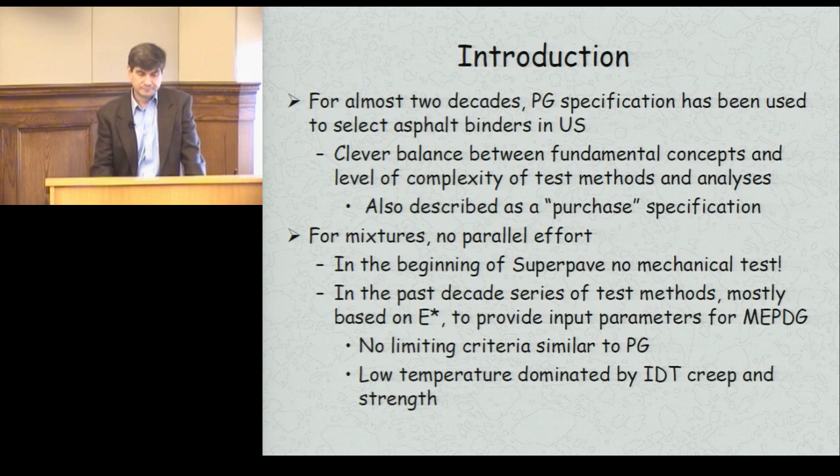So there was no limiting criteria similar to what we have for asphalts, and in particular for low temperature, there was a test method called indirect tensile test that was used to provide creep, stiffness, and also strength of asphalt mixtures at low temperatures. All right, so let me give a little bit of background on this low temperature testing.

that we have on asphalt binders. It all started many years ago with research done in Canada. Canada has even lower temperatures than we do, so there's no surprise they were among the first to do that, and this was happening 30, 40 years ago.

Basically, they found out that there is a correlation between the mixture stiffness measured after 2 hours of loading time and instances of transverse cracking in asphalt pavements.

And basically, they had the idea that if you have a material that is stiff, that means that material is also brittle, which at that time probably was not too far from reality, because we were using plain asphalt binders, no modifiers, no recycled asphalt, no newer technology. So that probably was relatively valid. If you had high stiffness, automatically that meant brittle material, which most likely will crack.

That was extended later on to asphalt binders using an empirical method based on a Van der Poel nomograph. Imagine 30, 40 years ago, computers were not used the way we use them today, and we relied a lot on graphical methods. There were some calculations that correlated mixture stiffness to binder stiffness, and this is what was used to actually develop the binder specification.

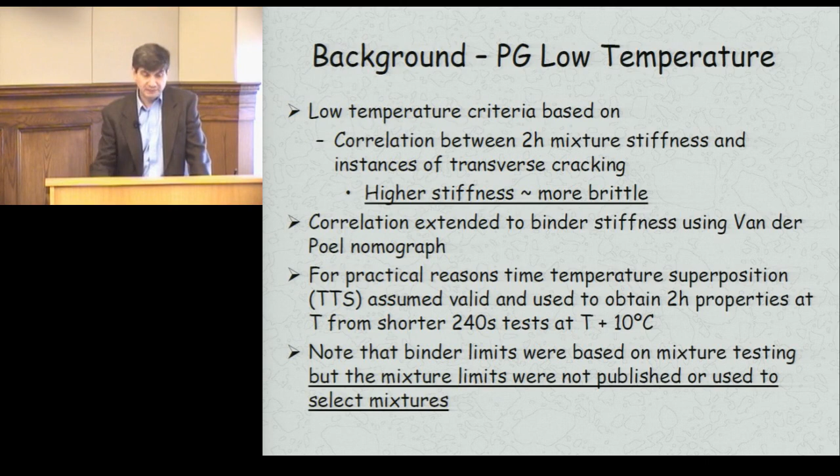So this is where the current PG specification comes from. Basically, the researchers came up with this limiting number: stiffness at 60 seconds at the temperature related to where you build your asphalt pavements should be no higher than 300 megapascals. So if it's higher than 300, that means it's too stiff, that means it's brittle, that means it will crack. That's how we actually buy asphalt binders today.

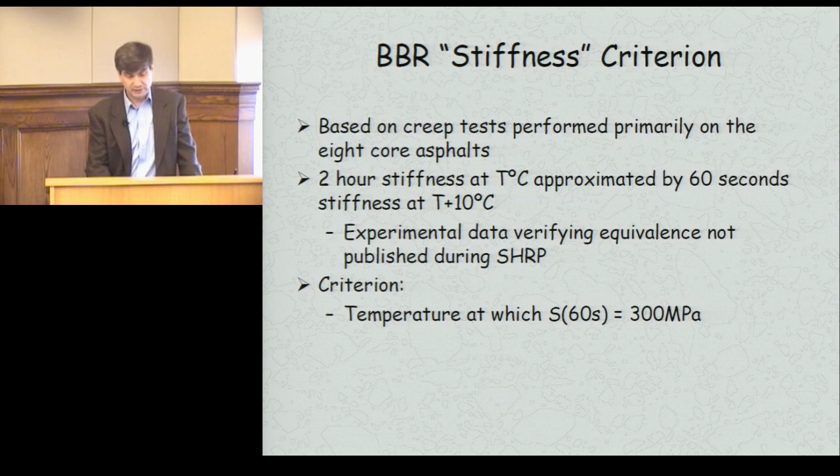They also added another parameter that is mostly related to relaxation properties of asphalt binders. Actually, it's a surrogate type of parameter because it is the slope of the creep curve and not the relaxation curve. But I'm not going to get into this discussion, though this specification also has another parameter called the M value.

There was a limit on this M value of 0.300. Basically, what this tells you is that if the slope is higher, more than 0.3, most likely your asphalt binder has good relaxation properties, a good viscoelastic material that relaxes stresses.

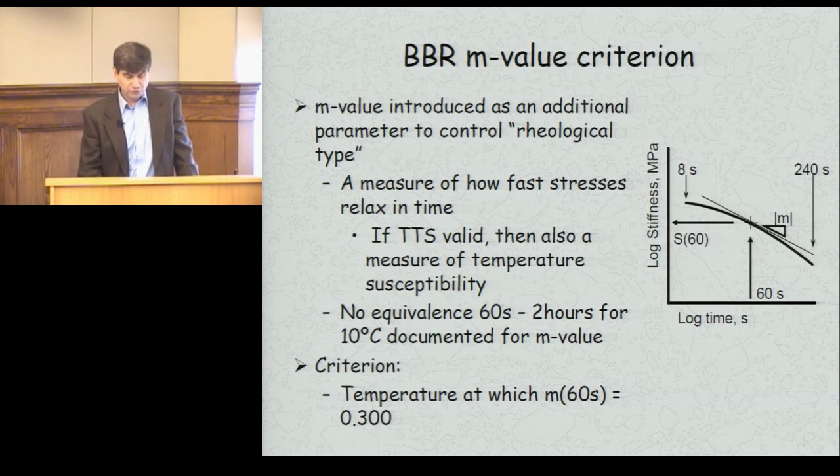As it gets colder outside, as happens in winter, this material is not going to hold these stresses, so it's going to relax them. That means it's very good for preventing cracking from occurring, which is a very good property of asphalt materials that are viscoelastic. So that's where it came from.

There was an attempt to include an additional phenomenon called physical hardening, which complicates things quite dramatically at low temperature, reflecting unique properties of not only asphalt but other polymeric materials. If you keep this material at low temperature for longer periods of time, the properties change. It becomes stiffer and stiffer with time, not just with lower temperature.

So at the same temperature, if you test the material after 1 hour, you get a set of values. If you test after 2 hours, those values are going to be different. So there is a stiffening effect. Basically, the structure of the material, depending on how fast you cool it, does not follow the temperature change. So the material changes slower and continues to change even though the temperature does not change anymore.

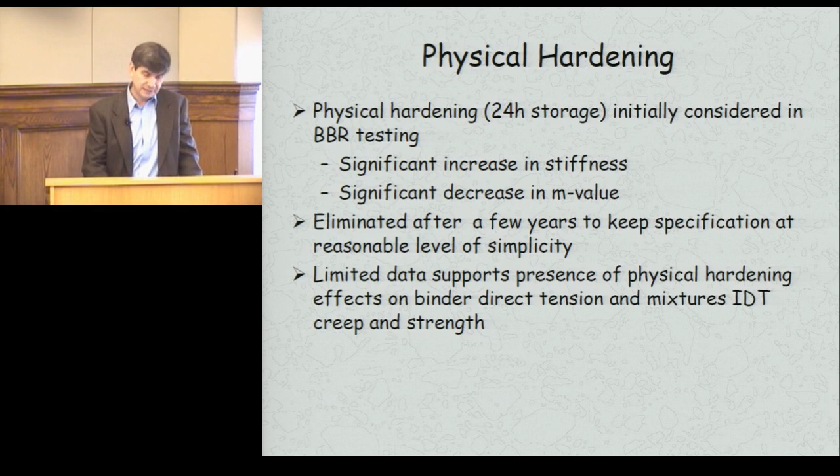But this was another complication, so it was taken out of the specification. The PG spec doesn't have that for asphalt binders, although it has been proposed in Canada by our colleague Simon Hesp, and it is currently used in Ontario.

Maybe some of you are aware that there is a 10 degrees Celsius shift, as I mentioned. For example, if a binder has a grade of minus 34 Celsius, the test is actually done at minus 24, so that requirement is for minus 34 plus 10 degrees Celsius. That's how we do it.

It's quite unique. If you ask somebody outside the asphalt area, they are going to be completely confused. This was only due to the fact that we wanted to shorten the test time from 2 hours to 60 seconds.

In my opinion, maybe it is time that we give up these 10 degrees. As I said, other people have no clue why we're doing that, and maybe we should try and focus directly on the temperatures, on the parameters that we get at the test temperature that we use today. But I'm not going to get into that discussion.

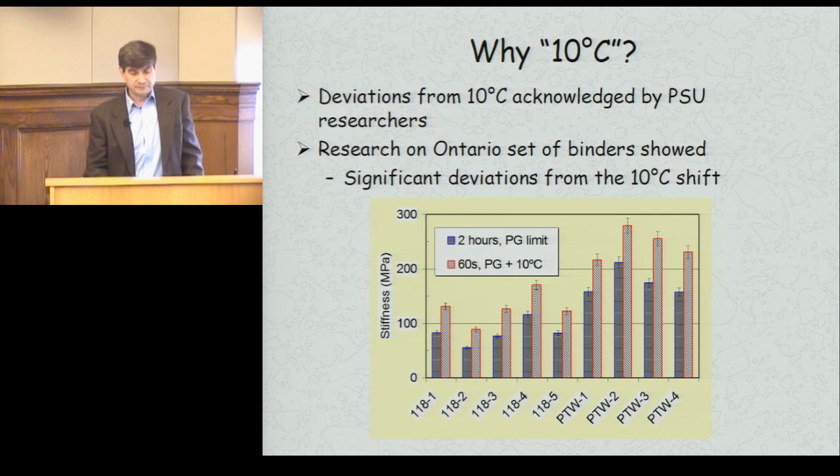As you can see, there are deviations from this 10 degrees rule, so not all the binders tested at minus 24 will have the same properties at minus 24 minus 10 degrees, which is minus 34, for example. I know it is a bit complicated, but that's how it is right now. So what I'm trying to say is the current PG spec has a number of limitations, and I'm going to make a point about that.

Why is that important? There was also another test, the only fracture test in the binder spec, the direct tension test, developed by my former colleague Raj Dongré, who spent a lot of time on it. It was the only fracture test, a very nice test.

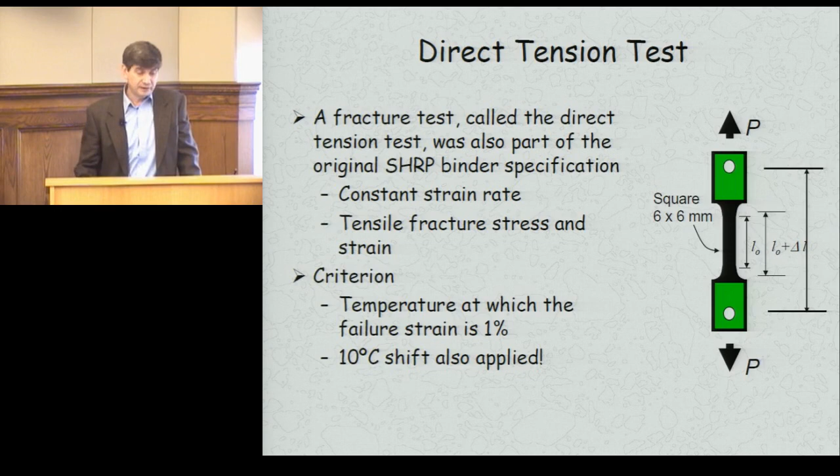However, due to poor repeatability, which is the case with fracture type tests, unlike the other non-destructive ones, fracture experiments are by nature less repeatable, and there may have been something associated with the material itself, but this was not explored.

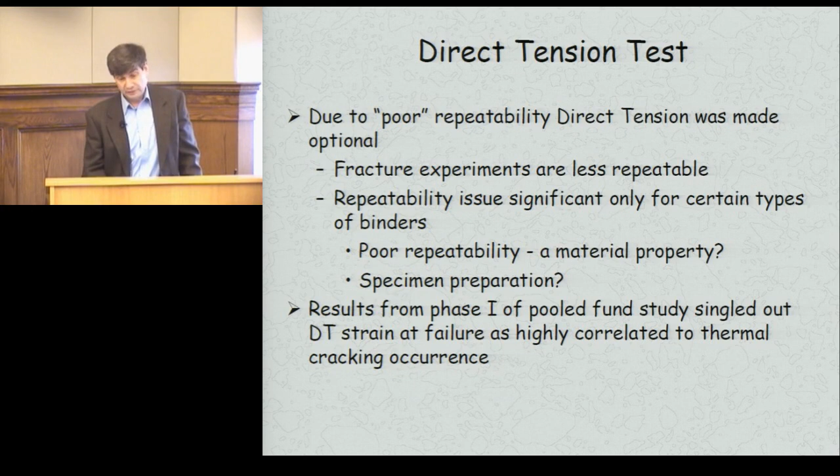As a matter of fact, our research as part of the first pooled fund study that I'm going to mention found out that exactly the strain at failure at low temperature was the parameter that correlated best with cracking in the field, which really tells you that stiffness is not brittleness. You really need a fracture type parameter if you really want to go in a serious way after what makes pavement crack.

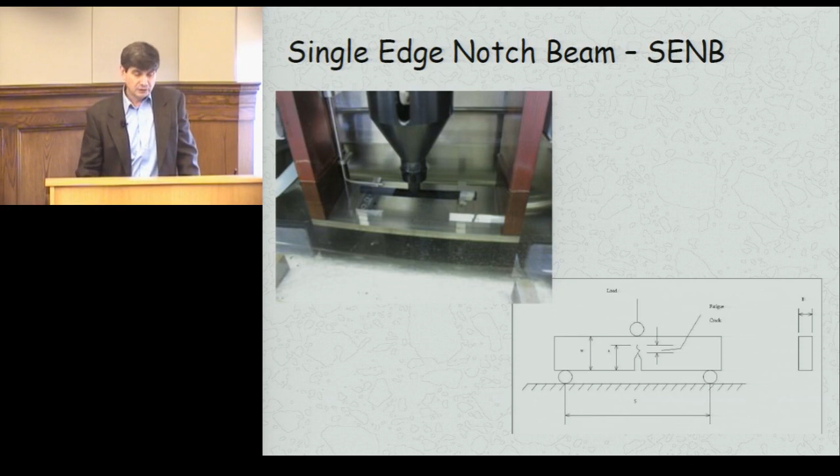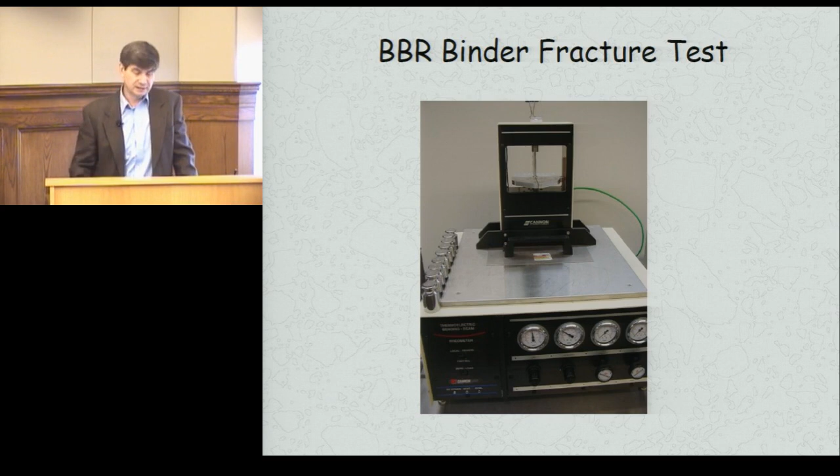And there are replacements to that right now. The direct tension test is not actually used, or is used by very few people. There is another test that is being advertised and used quite successfully by our colleagues at University of Wisconsin-Madison that uses a single-edge notch beam, and we are also pursuing another effort using a strength test based on beams, but I don't have time to discuss this. So what I'm trying to say is we have a binder specification.

It has been in place for 20 years. This is probably the best implemented, if you ask me, product of the SHARP research effort. Maybe some of you are aware that in the early 1990s the federal government put $150 million towards pavement research. Unfortunately, after that was finished, there was a big gap with no funding afterwards, so obviously you always have the issue of continuing funding, and that's not the best situation.

But anyway, this PG spec has been accepted, and the fact that the binder is the one that influences low temperature cracking properties has been accepted, I would say, more or less. Most people would say low temperature cracking is controlled by the asphalt binder. Many studies validated that the current PG specification, with its limitations, actually works relatively well.

So if you are in Minnesota, you are going to use a PG binder with a lower range of minus 34 Celsius, because you may expect temperatures that low. If you move to parts in the southern part of the country, you may end up with a minus 22 asphalt binder, not because it's cold down south. So we had this specification that had some limitations.

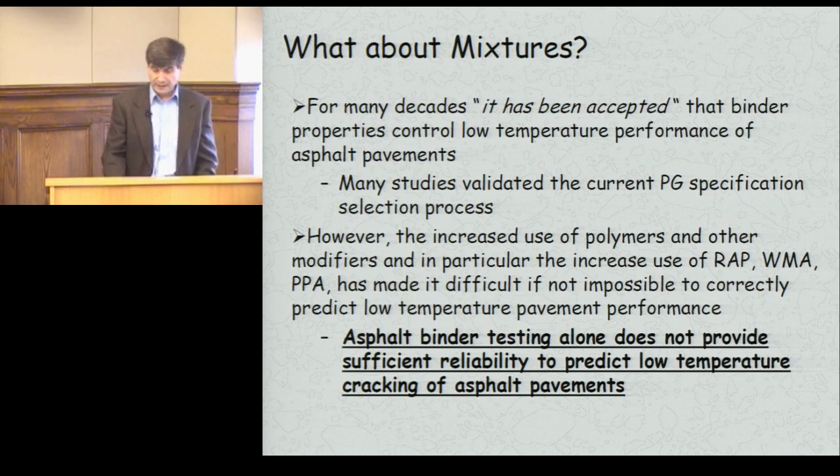And this is where the pooled fund study, the first pooled fund study, came into place. It started in late 2003, I believe, and the first phase finished in early 2007, and it was published. We continued with a second phase that is finishing in the next 3 or 4 months.

So what we tried to do here was to start a comprehensive investigation of low temperature cracking and look at how binder and mixture may correlate. Can we really use binder to predict mixtures? In addition, we wanted to come up with test methods that could measure the low temperature properties of asphalt mixtures, for selecting the right materials and also for input into the mechanistic empirical pavement design guide.

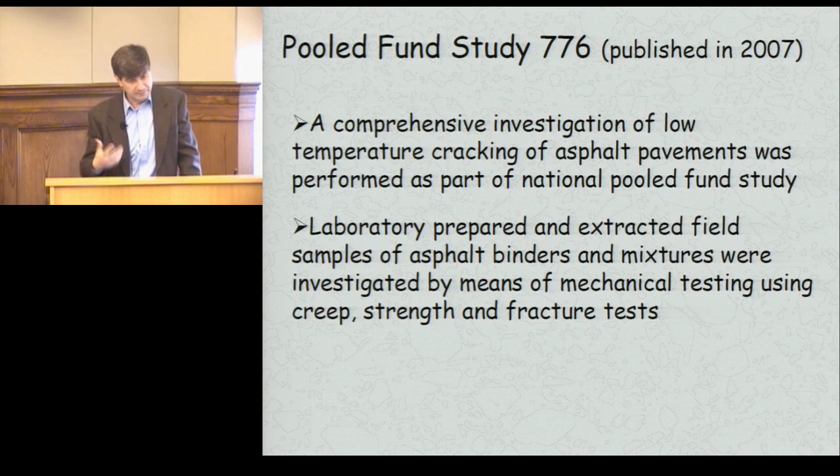So basically that's what we've done. We had a lot of money, thanks to our sponsors. There were 4 universities that started working on this pooled fund study, and I'm going to acknowledge them at the end. We took all the different asphalt mixture tests and all the different asphalt binder tests available, or that we've been developing, and tried to correlate the results and parameters from this experimental lab work with thermal cracking in the field.

And I can tell you this is not an easy thing to do. First of all, you need a facility where you can monitor pavement performance, and also some organized way of getting the materials used in these projects—the original materials, aged materials, maybe taking samples from the road and testing them and correlating them with pavement performance.

And that's why I think MnRoad was very critical to the success of this project, because it's a unique facility set up to provide this kind of information. Otherwise, it is very difficult from a logistics point of view to follow and monitor certain roads and take samples.

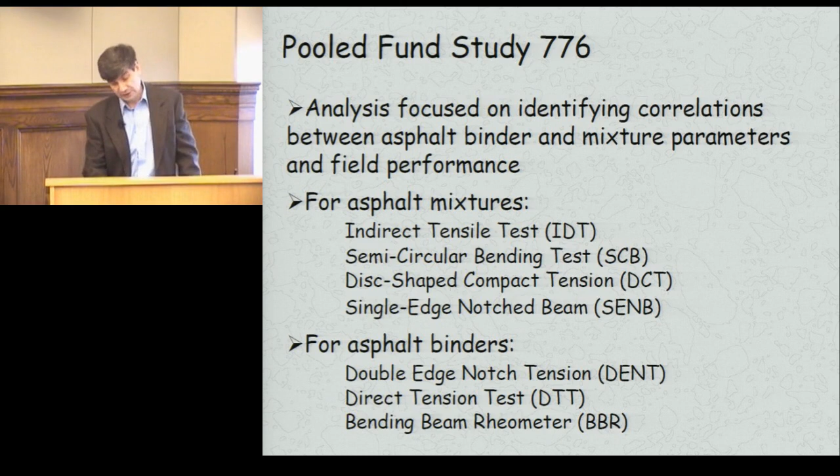So these were, for example, the mixture tests. The first one is called semicircular bend test. It's basically done on a notched specimen. This is the DCT, disc compact tension, again a notch specimen, the classical SENB, single edge notch beam, that is used for testing many other materials. It's a standard procedure for metals.

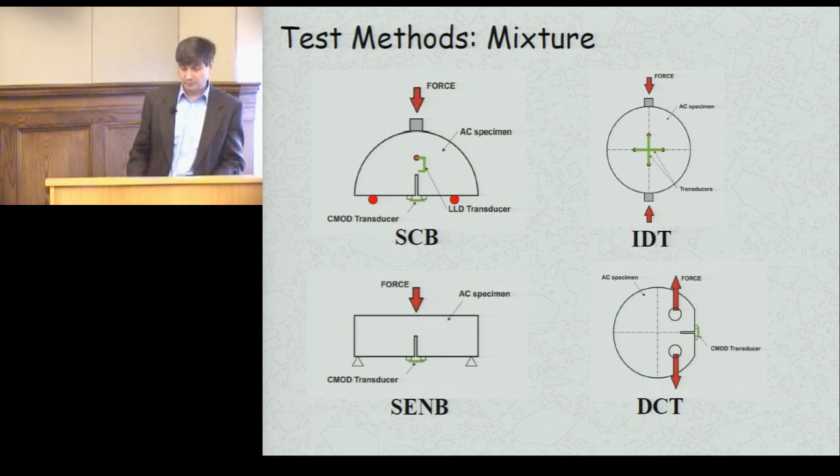And also the indirect tensile test, some people call it the Brazilian test, that has been used traditionally in the asphalt area. So basically you apply compression and you get tensile stresses, horizontal tensile stresses, and you measure indirectly the tensile strength. And you can also do creep tests.

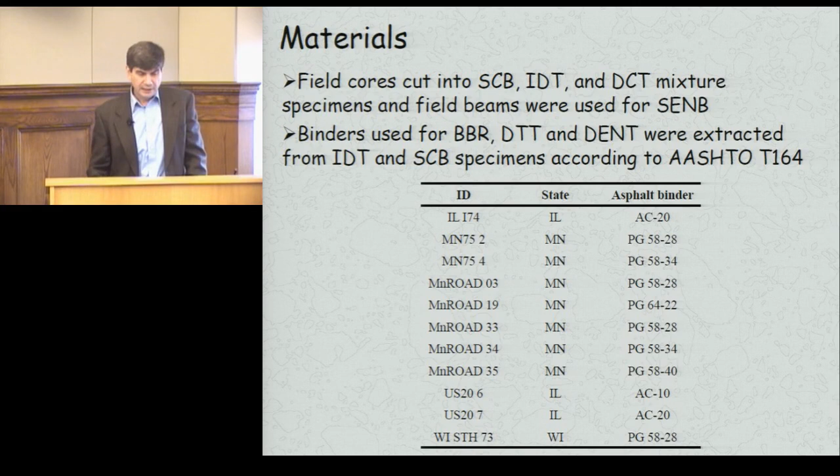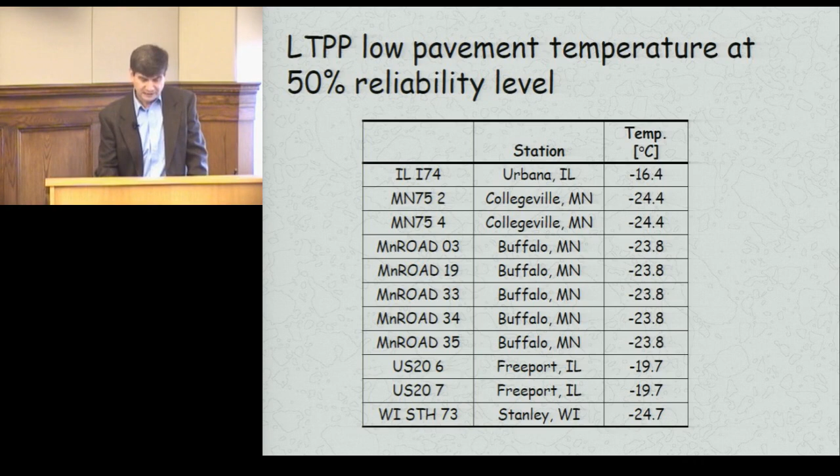And we performed tests at temperatures that would match the low pavement temperature at 50% reliability level according to LTPP. And if you look at some of the numbers here, for Minnesota, this is the MnROAD facility, that temperature is approximately -24 degrees Celsius, which basically represents a PG asphalt binder of -34 plus 10 degrees Celsius, as I mentioned to you before. So there is some science behind it, so to speak.

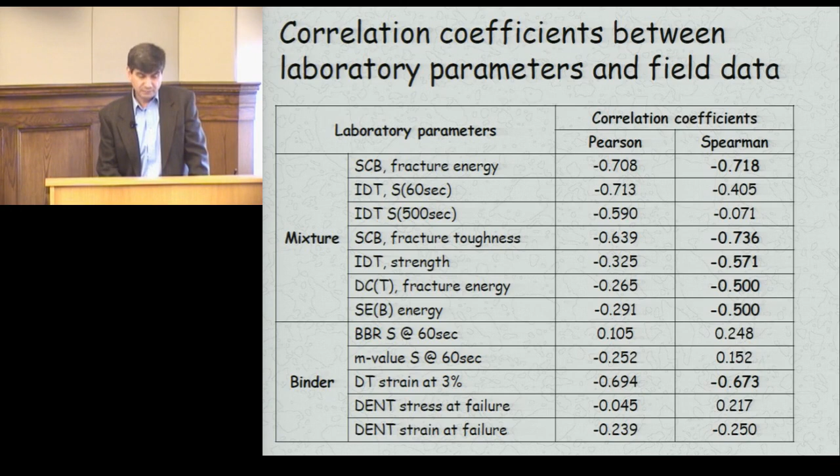And we got the results, and then we actually did simple correlations. We found out that for mixtures, the highest correlation with the occurrence of thermal cracking was observed for fracture-type tests, fracture energy, both the SCB and DCT, also fracture toughness, and for asphalt binders, as I mentioned, the strain at failure with the direct tension test.

And here are some of the plots, and I have to tell you that these plots actually reflect a lot of work. They are not very easy to get, and these type of plots are the only ones so far that can be used to come up with some sort of specification value.

If you look at this, on the horizontal axis you have transverse cracks in linear feet per 500-foot sections, and on the vertical axis you have, in this case, fracture energy obtained with the SCB test. As you can see here, it appears that, and the correlation is relatively high, that once you get into the 350 or higher, close to 400, transverse cracks actually start to almost disappear. So you have less and less thermal cracks.

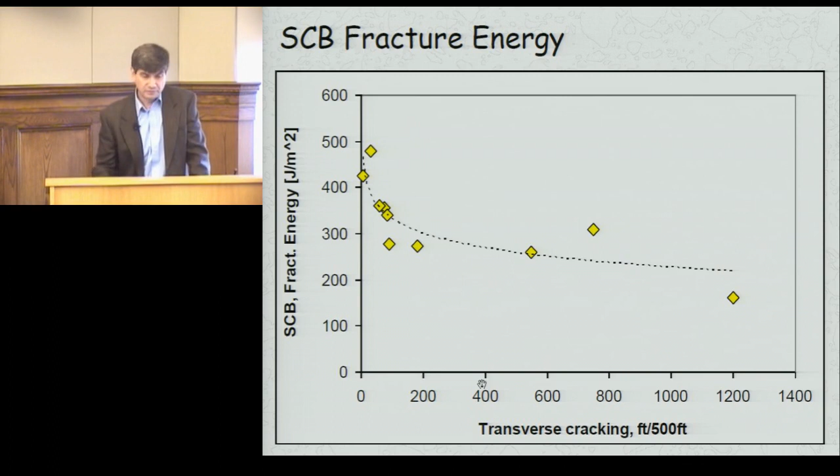While if you go to lower values, 300 and below, you get a lot of cracking. So this is a good indication that SCB fracture energy may be used for developing a specification, a criterion for asphalt mixture selection.

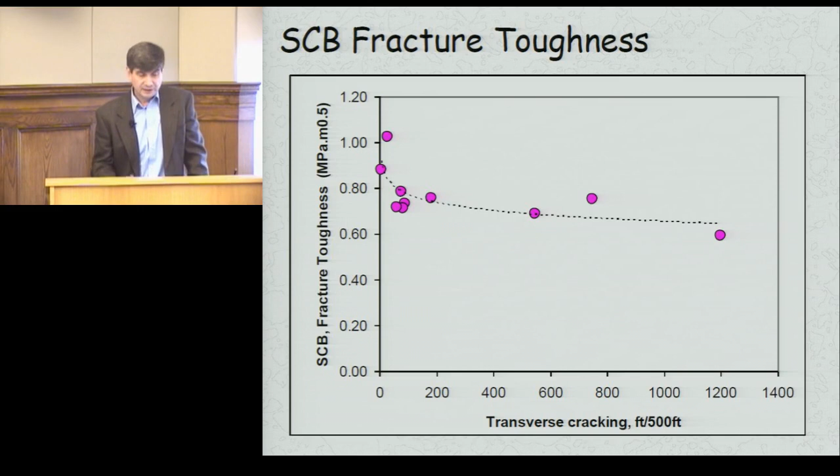Similarly, for fracture toughness, there is a correlation, maybe not as clear because there are not a lot of points here, but we hope with more data that becomes available to perfect these plots. This is DCT. Actually, my colleague at the University of Illinois who developed this plot for DCT, they have additional data from other projects, and they also found out somewhere in the vicinity of 300 to 400. It's probably a good limiting value to set up as a threshold for asphalt mixtures.

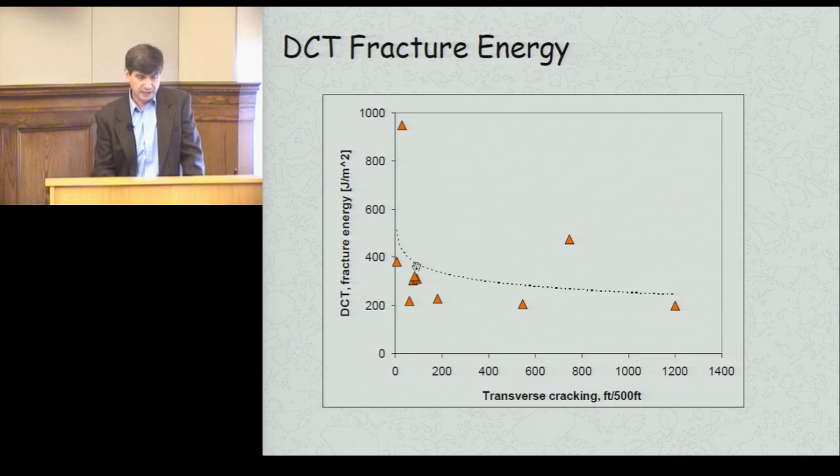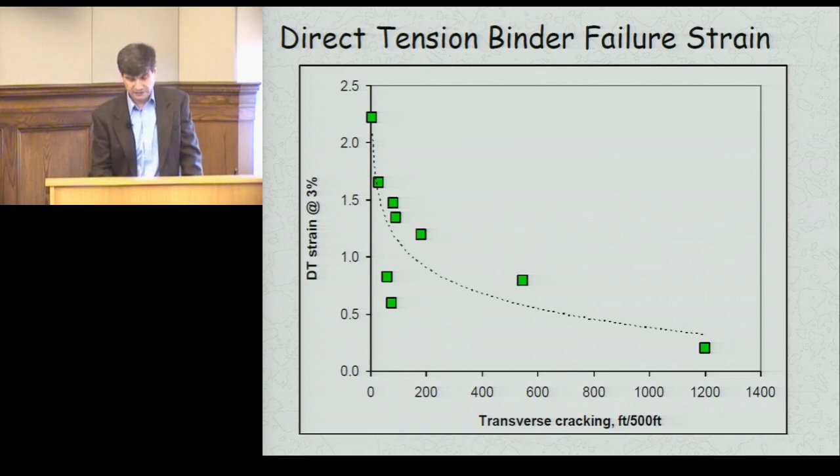And this is for the asphalt binder. Again, this tells you that basically a higher strain at failure, so more of an indication of a ductile to brittle transition rather than brittle region, would associate with fewer transverse cracks. So that was not a bad finding.

So basically, at the end of 4 years of research, we found out that we developed these fracture tests, and the results from these fracture tests correlate best with what we see in the field.

These results that we used to show those plots were basically performed on cores. So there were cores taken out of the pavement, taken to the lab, and tested. So that is something that we have to keep in mind.

The PG spec has done a very good job, and it represents a very good start, but there are other factors that can influence the properties of the mixture. So we really have to have also a test for asphalt mixtures that will give us an indication of the quality of this mix.

So at the end of this pooled fund study, we are asked by our sponsors to continue the work and come up with a mixture specification. So can we develop that?

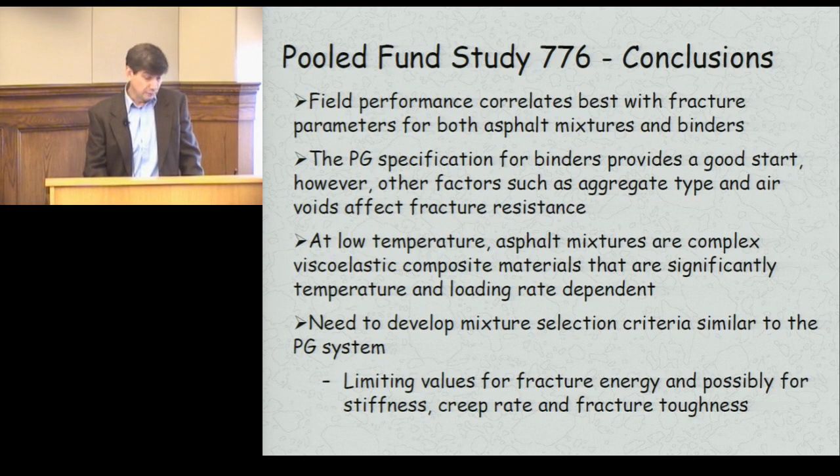We knew that this is a difficult thing to do for many reasons, and I'm going to discuss this towards the end. But we said, we have a lot of very good data, so we would like to move into exploring and hopefully developing a specification for asphalt mixture.

So basically, at the end of this current pooled fund study, we will provide a concept or a draft for a new mixture low temperature cracking specification.

And we will follow the same idea that was basically used for the binder testing, for the binder specification. That is due to two things: in this way, you have a better understanding, a better correlation between the asphalt binder and the asphalt mixture properties.

I have to tell you that for many years, there were two individual groups, the binder guys and the mixture guys, and most of the times they would not communicate with each other. So the binder guys would neglect what the mixture people said and vice versa. I think it is about time that these two groups get together and come up with a similar way in which they characterize these two materials.

Based on the results from the first pooled fund study, the research team decided to concentrate in particular on the fracture type tests and in particular on fracture energy. So this is our main goal, to come up with a criterion based on fracture energy, either from DCT or SCB testing, and maybe we will add a fracture toughness limit that is not clear at this point.

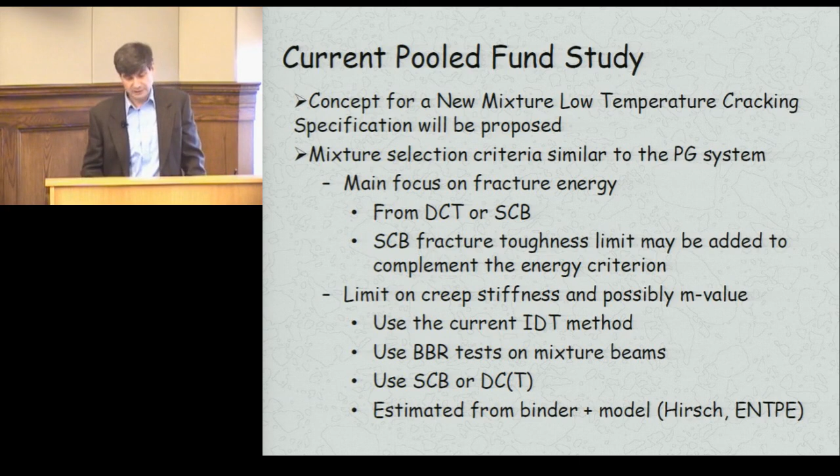As another possibility, in terms of fracture energy, these are the two tests that actually were further evaluated in this second phase of the pooled fund study. You can see that they are quite different. One of them, the SCB, it's a little bit simpler to perform. However, obviously you apply compression and the crack opens in a direction perpendicular to the force, so you have to actually measure the displacement along the force direction.

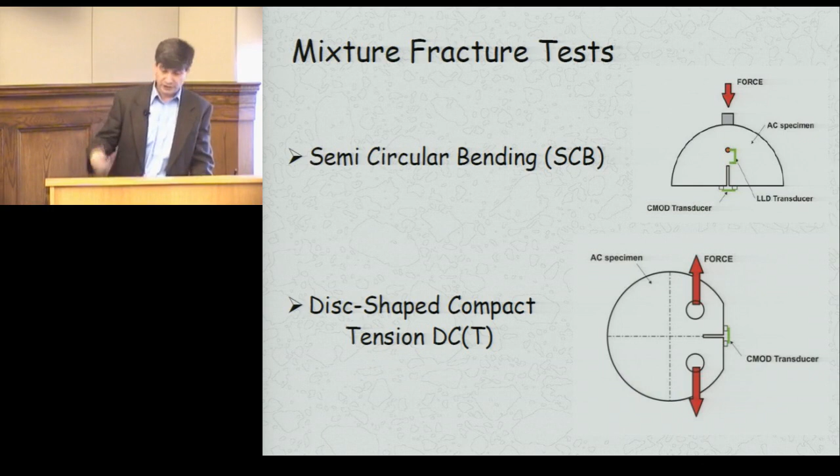Which requires a bit more displacement transducers, while the disc-shaped compact tension test, it's a spec test that is used, it's a version of the SENB test, so it's very clear, theoretically quite straightforward, but preparing samples in such a manner, drilling holes, may actually create some difficulties, although the research team at Illinois, they have done fantastic progress on perfecting that.

This is an example for you of the semicircular bend test. And of course, this is, as I said, the fracture test on notch specimens, and the test is controlled, the load is controlled by how fast the crack mouth opening displacement moves, and so we can get a full, also the softening part of the curve.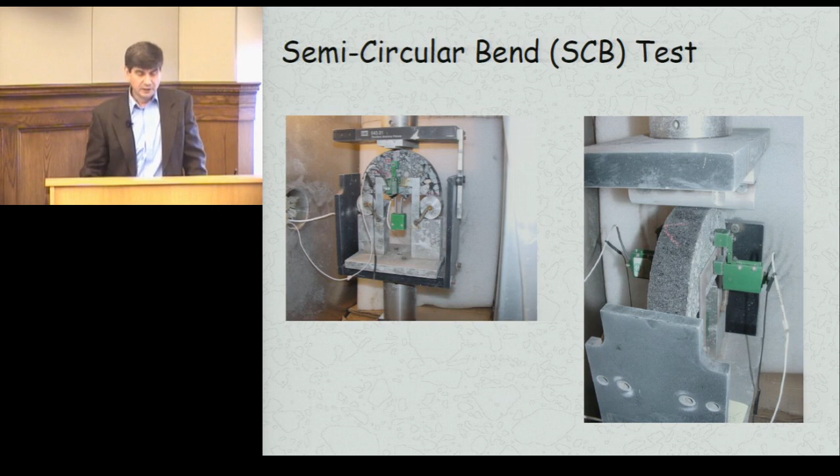For creep, as I said, we could continue using IDT. However, there are a few issues with the IDT, although so far it has done a reasonable job, and this is mostly related to the size effect that is very difficult to quantify if we will ever move into this area, and the failure mechanism that may be more due to shear failure than anything else at the top.

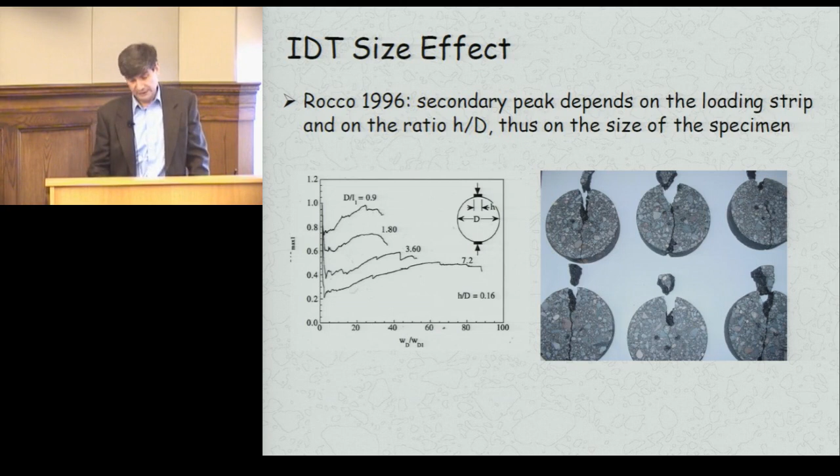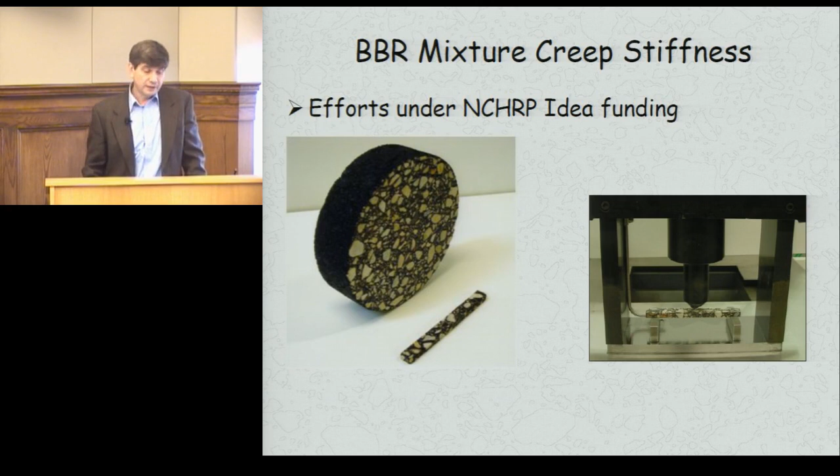I believe my colleagues at Illinois are actually flattening the top of the IDT to get rid of this problem. This is what we have been proposing for creep stiffness using these very thin mixture beams, and we actually showed theoretically and experimentally that this can be done, obtaining similar results in creep for IDT testing. Or use, as I said, binder data with some sort of model.

This is just a quick presentation of a so-called analogical model called the Huet model, and the expression for creep at the top here, as you can see, there is an expression for creep. It also has an expression for complex modulus, which is really nice. So once you figure out the model parameters, you can actually also get complex modulus. I'm not going to get into the details.

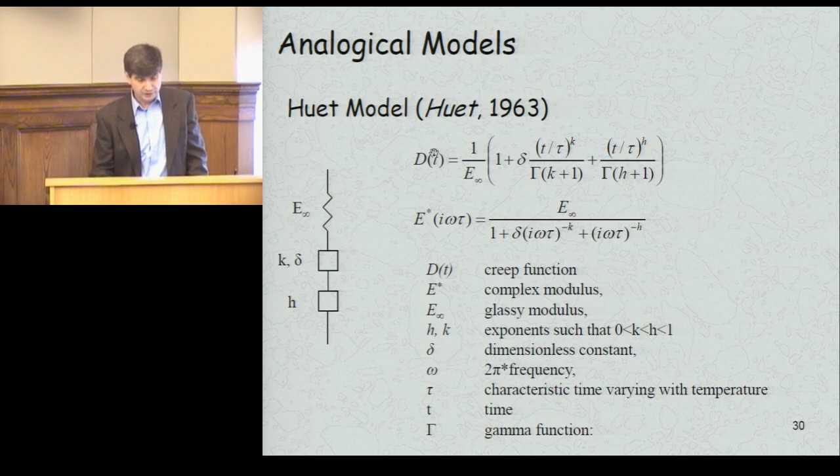Basically, it can be shown that the creep stiffness of the mixture is directly related to the creep stiffness of the binder using some parameters that can be obtained from experimental work, which is actually quite important. This transformation, as we call it, is very easy to apply backwards, to solve the inverse problem, where if you know the asphalt mixture property, in this case the creep stiffness, you get the binder property. This is very important when dealing with mixtures that contain RAP, because it's a way to find out the contribution of the asphalt binder in the mixture. This is work under investigation, but it was very nice work, and we have been using it.

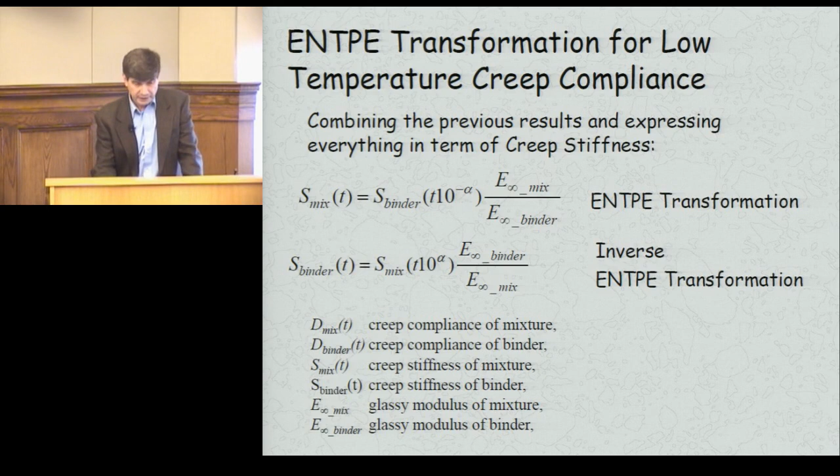Okay, so after all these discussions, what are we proposing? And of course this is very preliminary - we still have a few more months to finish the project and get a little bit more data. But based on the information we have right now, most likely a lower limit of 300 to 400 joules per meter squared appears a reasonable value for fracture energy, either with SCB or DCT.

This is a value that you get at PG plus 10, which in most cases will match the LTPP database temperature. As I mentioned, this is based on extensive data from University of Illinois and University of Minnesota. For fracture toughness, I can't say exactly, but possibly a value of 800 kilopascals meter to the 0.5, though this is debatable - are we going to put a lower limit? Of course we would like higher toughness and higher energy if possible, but sometimes they go in opposite directions, as you well know.

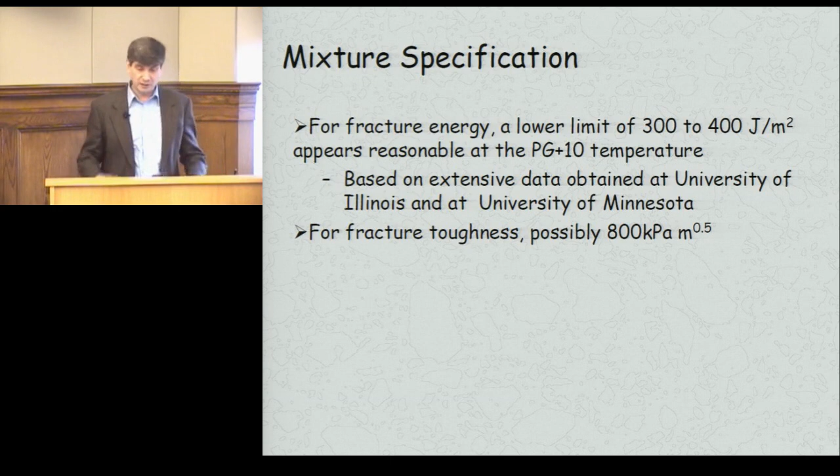For those of you who are not familiar, this is the type of information we get from fracture tests, SCB or DCT. This is the curve that also has the softening part, which is very important in modeling crack propagation. Basically, the energy is the area under this curve, and the fracture toughness is related to the peak load, so you know where that comes from.

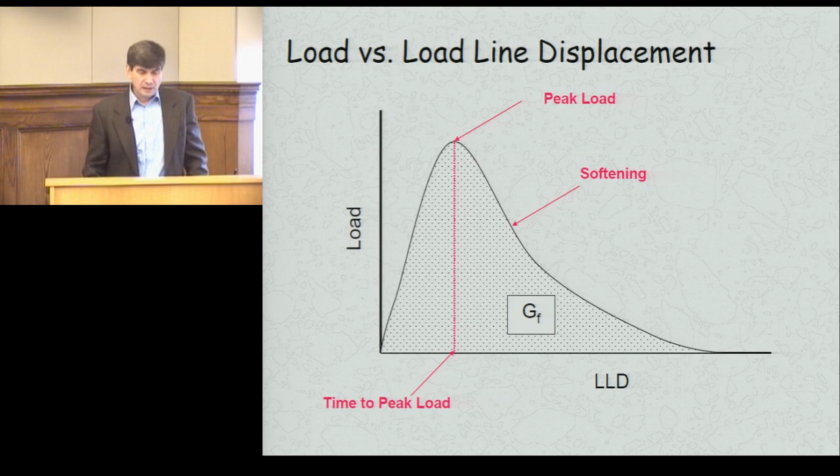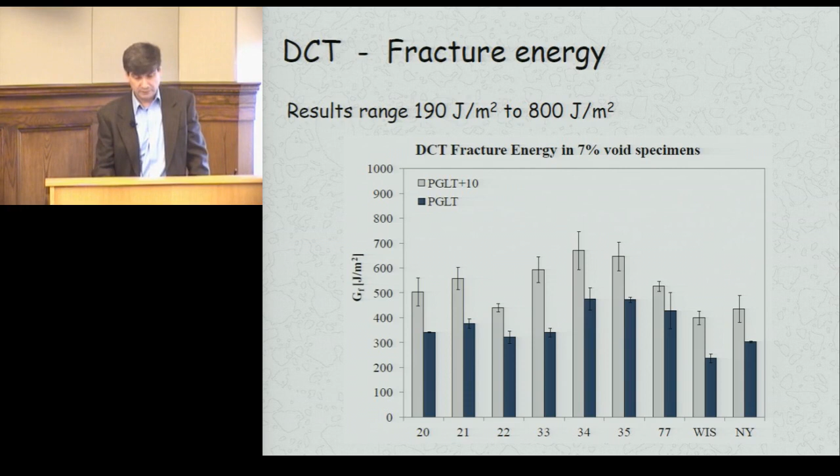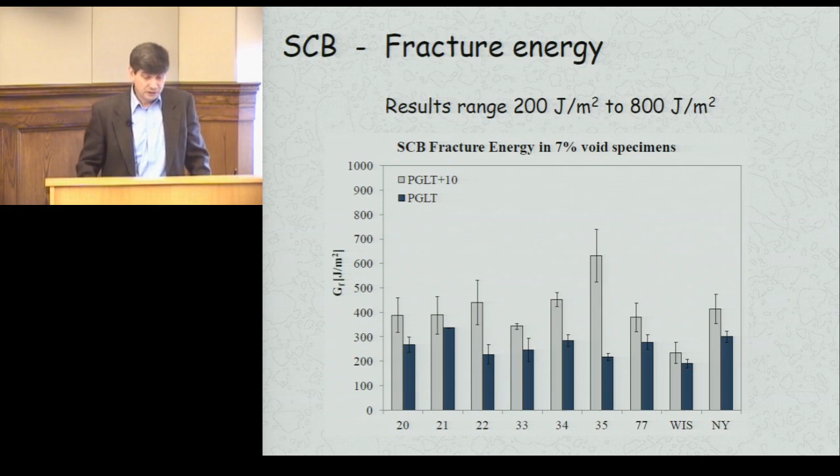So basically a very good job with these mixtures. Same thing with SCB, we can see that the values are similar, so the mixtures that we tested were actually good mixtures. That would be a number that we could propose as a threshold for selecting asphalt mixtures.

For creep stiffness, this is something we are still investigating. Basically what we've done, more out of curiosity, was to take the binder 300 megapascal limiting value and convert it to an asphalt mixture limiting value. This is a bit tricky because in asphalt materials you also have a very important factor called aging, and without getting into the details, the binder specification is done on the binder after long-term aging called PAV, pressure aging vessel, while mixture testing is mostly done after short-term aging.

There is a long-term aging procedure, but some people don't think it is appropriate or really simulates what happens in the field, which is a different thing that has to be mentioned here.

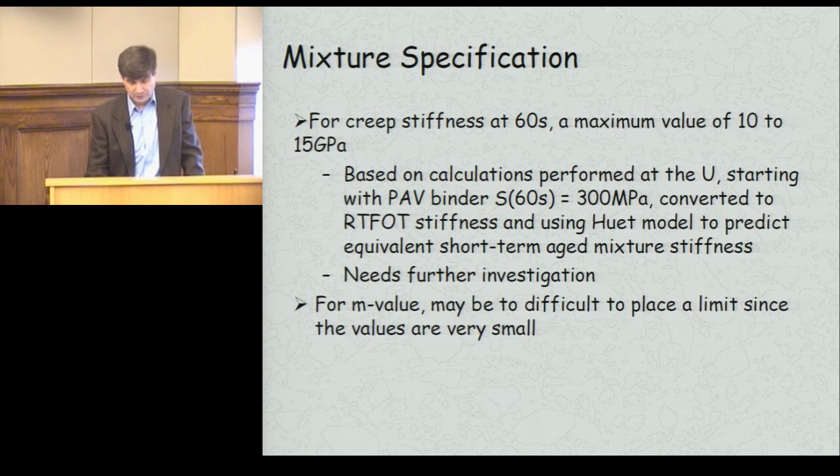For this slope, it may be very difficult to place a limit because the stiffness of mixtures is very high and the creep stiffness curve is very flat. So we have very small m values, which makes any sort of threshold value difficult to interpret, as you may have errors in your test method that can be higher than significant differences in the slope.

All right, so this is not the only thing that we are going to do. Don't think that we spend all this money just to come up with these parameters, which was a huge effort. Most of these parameters will also go into the MEPDG, the thermal cracking model component of it, the low temperature cracking model.

Currently we have something called the TC model, and our colleagues who developed the TC model will provide, I believe very soon, a new version of the TC model called ILLI Crack, ILLI from Illinois.

And of course, I couldn't resist asking them if the best coffee in the world, illy, is also made in Illinois. I know it's not made there, but anyway, just wanted to make a joke on them.

And you can actually use these parameters from testing as input in this thermal cracking model, which I think they are going to provide as a separate standalone code that can be used by itself or in conjunction with the MEPDG.

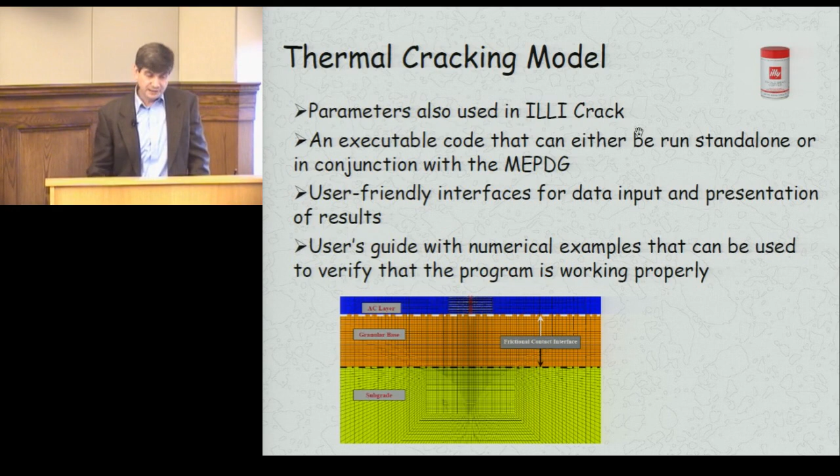So basically, in the new thermal cracking model, you will need creep properties of mixture, fracture energy of mixture, which was not used before, thermal coefficient of thermal expansion and contraction, pavement structure information, and obviously input about the temperature of the location.

The output is the thermal crack spacing versus time, or number of thermal cracks per 500 feet of a test section.

So basically, this is what is expected: you input all these values and it will tell you after this many years your pavement is going to be cracked like crazy, or if you use this type of materials, it's not going to crack for many years to come, which we all want.

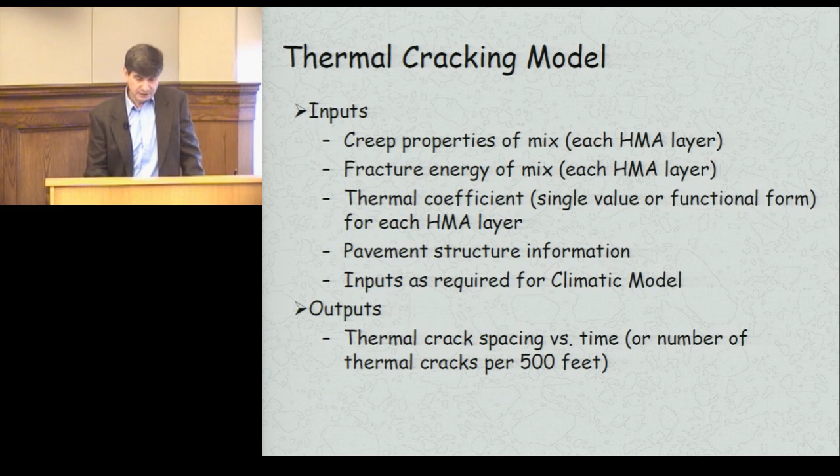So basically that's what we are proposing at the end of this second pooled fund study and last pooled fund study. So there are a number of main obstacles which are more related to mixtures in general.

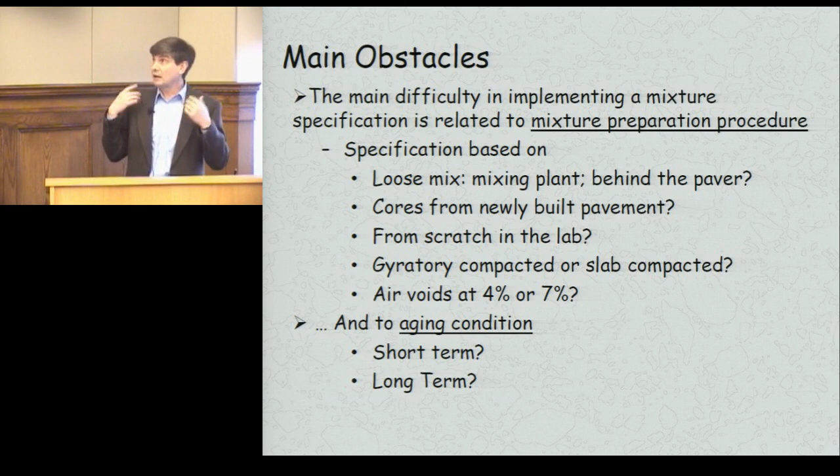It has nothing to do with low temperature properties. And this is also a reason why we didn't have a mix specification, because there are a lot of additional factors that influence properties.

Unlike the asphalt binder - that's the asphalt binder, we consider it a homogeneous material. We know its condition, we put it in a rheometer, we test it, and we get consistent numbers. But now you get this composite material, and one of the main issues is how are you going to prepare your mixture?

And there is actually research going on trying to come up with an answer, because you can do it in various ways.

You can basically take loose mix from the mixing plant. So you go to the mixing plant when they are making this nice asphalt mixture, fresh from the hot mix plant, and take it to the lab and prepare your specimens.

You can select it behind the paver, take loose mix. This is done on a regular basis.

You can even take cores from a newly built pavement, although that is always an issue. I mean, you build a nice new pavement and then you go there and take cores out of it, but I guess it's maybe for a good cause.

Prepare your specimens from scratch. So you have the mix design, you take the aggregates, look at the mix design, take the right aggregates, the proportions, the asphalt binder, heat it up, compact it in the lab, prepare specimens.

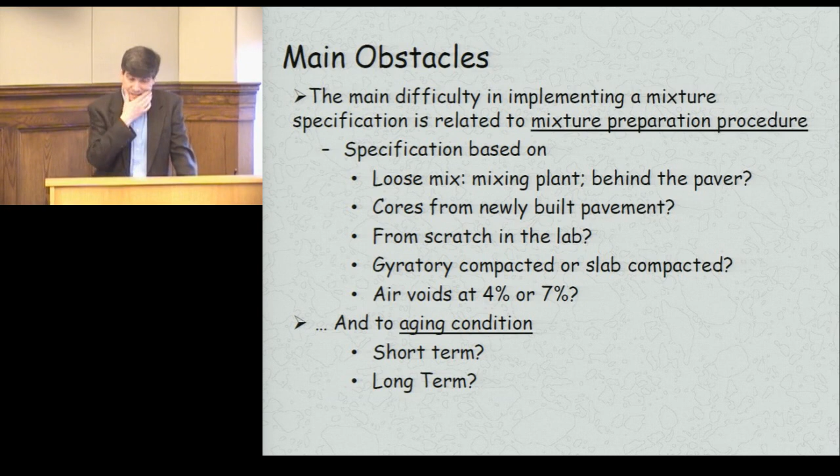Then another big factor that again is not well understood: aging. Are you going to short-term age it, which is representative of what happens to the mixture after it comes out from the mixing plant, is laid down and compacted, or long-term, which means the aged mix after 5-7 years in the pavement? And of course the issue is whether the laboratory procedure for long-term aging is representative of the field. If you talk to the chemists in the area, they'll tell you a lot of things, and it gets quite complicated. So many ifs, many obstacles.

What we will suggest is, let's come up with a set of mixture preparation and aging conditions. We will start somewhere. The PG binder that seemed to do a good job was not perfect, so why don't we start somewhere? As we get more data available, we will maybe provide correlations that take into account aging, sample preparation, and things like that. We believe it is time to move on and finish this project and implement a low temperature mixture specification. We are not going to implement it, but we are going to provide all the help and support that we can, and try it, and even if it's not perfect, at least we start somewhere. That is what we would like to do once we finish this research project.

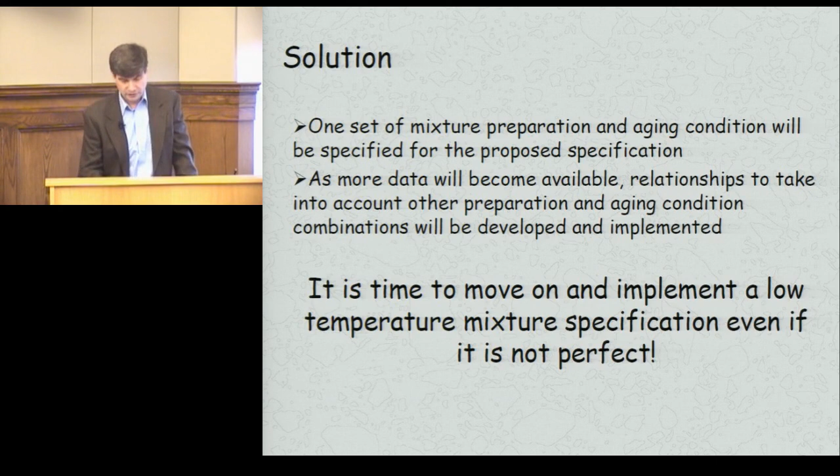I guess there were a lot more people interested in low temperature cracking at that time. Maybe they were hopeful that we were going to be able to solve it very quickly, which actually is not possible because it is a difficult problem.

I would like to mention that this work would not have been possible without the generous financial and logistical support from MnDOT, which was also, or is, the lead state. They have provided the samples that we have tested in the lab, taking cores from MnRoad, loose mix, and without this help we wouldn't have been able to generate all this interesting data. And of course the support from all the other states that participated: Wisconsin, New York State, Connecticut, Iowa, North Dakota, and the consistent supporter of this project, and of course Federal Highway Administration. I would also like to acknowledge the critical contributions of our colleagues from University of Wisconsin, University of Illinois, and Iowa State, and to thank them for the great teamwork.